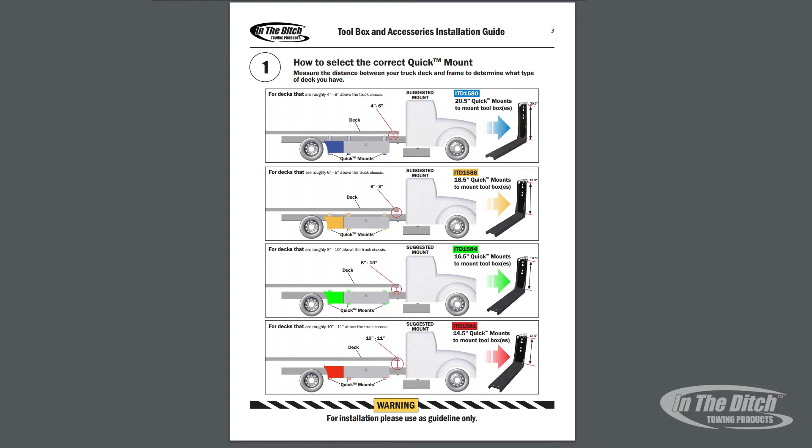So we're going to start out with step one, and that's to select the proper quick mount for your application. When selecting your quick mount, the first measurement that we recommend you get is from the top of your frame rail to the bottom side of your carrier deck or your utility bed. Once we have that dimension, you can enter it in our operations manual, and it's going to walk you step by step through how to choose the correct quick mount for your application.

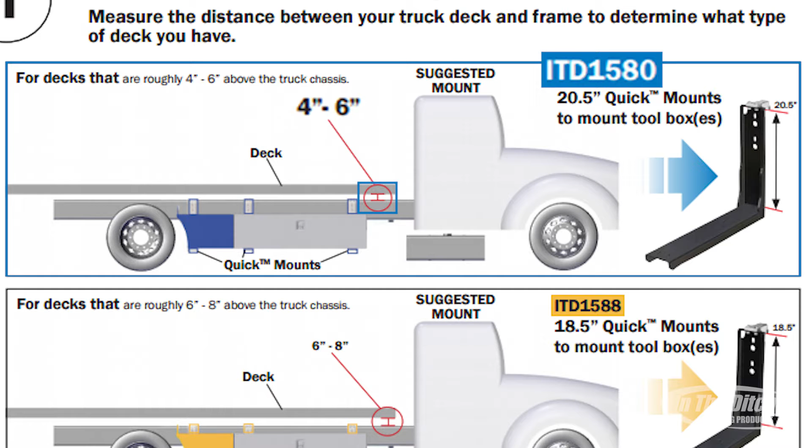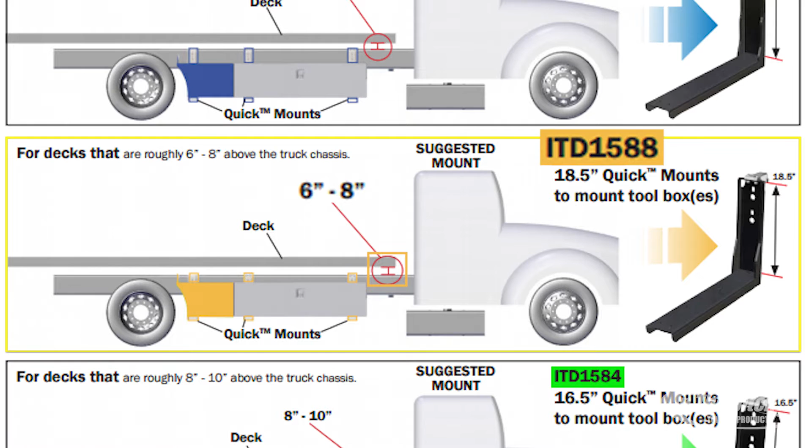If you have between 4 and 6 inches of gap, as shown here in the diagram, you'd want to choose the ITD 1580 quick mount, and that's designated by the blue icon. If you have between 6 and 8 inches of clearance, we'd suggest that you use the ITD 1588, which is designated by the yellow icon. If you have 8 to 10 inches, you'd go with the 1584 quick mount, designated by the green icon.

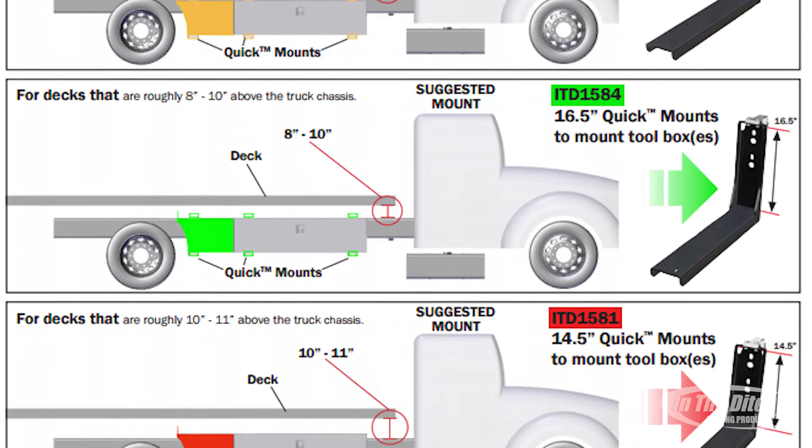And if you have 10 to 11 inches, we recommend you use the 1581 quick mount, which is designated by the red. If you want a real custom installation, we suggest you measure and choose your quick mount on your own, or call us and we'll help you.

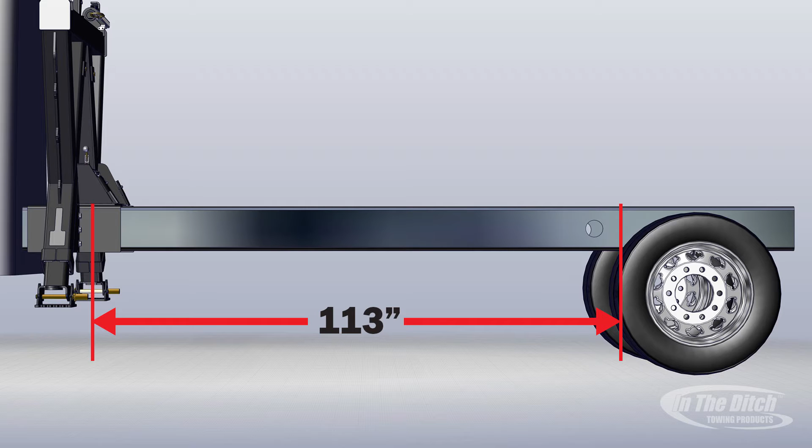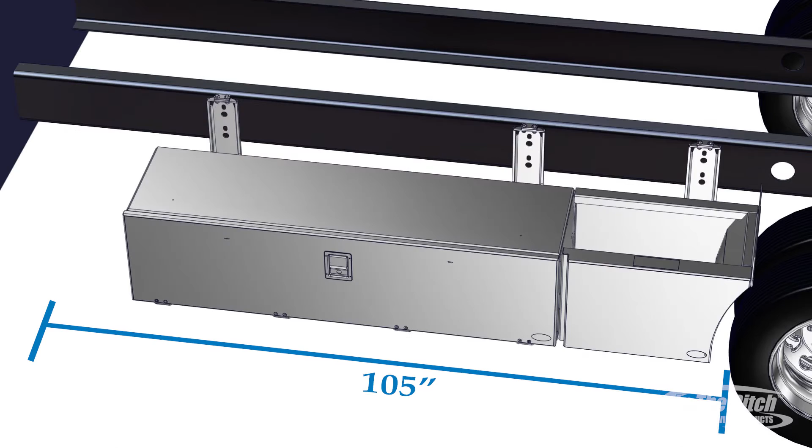Now that we've moved to step 2, what we want to do is measure the usable space, and that's the space between the rear wheel and the nearest obstruction at the front of the truck. And on this truck, we have 113 inches of usable space. Now we're going to subtract 5 inches for wheel clearance at the rear and 3 inches for clearance at the front of the toolbox. After we've done the math, we have 105 inches of usable clearance left. And what that tells us is that we can use any combination of toolbox, storage fender, or accessory as long as we stay within 105 inches.

Now we're going to move to step 3, which is choosing your toolbox. And for this tow truck, we've decided to use the 70-inch toolbox. So we're going to take the 105 inches of usable space, subtract 70 inches, means we now have 35 inches of space left over. We've decided on this particular build, we're going to add a storage fender. So we want to use the biggest storage fender we can, and we know we have 35 inches of usable space.

Now remember, at the beginning I'd mentioned that we're using the ITD 1580 quick mount on this that has the blue icon. So when we go to select a storage fender, we want to select from the blues, because those are the storage fenders that were designed to work with that quick mount to give you the best wheel opening look. So we have 35 inches of space, so we're going to move along and we find the ITD 2329 has 34 3/4 inch space.

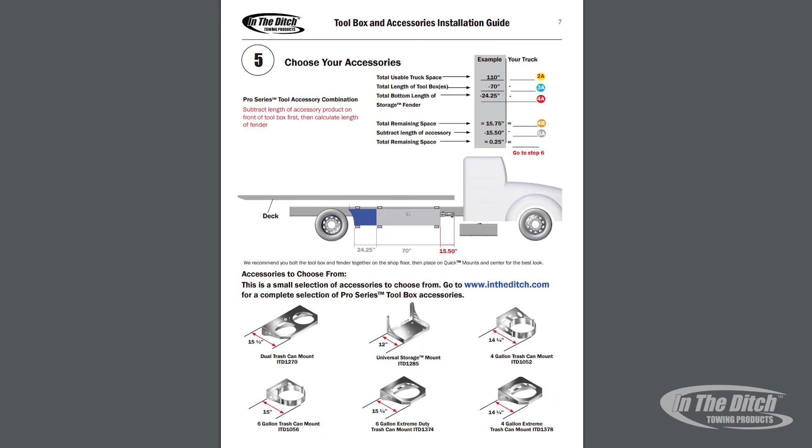So we're going to go back to our workbook and write that number in, and as you can see, we have a 1/4 inch gap left over, and we don't make any product that's a 1/4 inch long, so that's all we can use. Now if you don't want to use a storage fender, you would just move on to step 5 and work on your accessory, but the process is the same way.

Now all the measurements are done, all the product's been ordered and delivered. Now it's time to begin the installation process, and we're going to do that by going to our workbook and starting with step 1 of the toolbox and accessory installation. And as you can see, the very first thing we need to do is install our quick mounts.

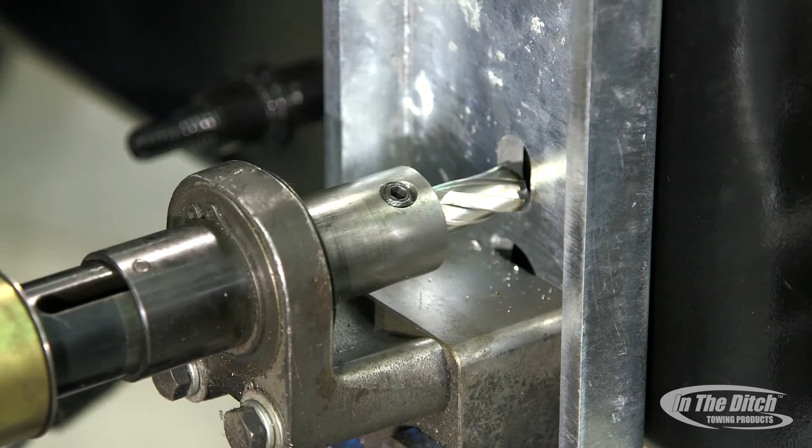When it comes to fastening the quick mount, we wanted to make it really easy for you to put holes in the frame. So we accomplished that by giving you 2 options. Option number 1 is if you're going to drill, you can drill using these 2 holes. But should you want to plasma cut your holes, we've created these 2 plasma template holes. And when you put your plasma cutter in there, we've sized the hole so that when your plasma cutter's done, you should be left with a perfect 5/8 hole.

It's important to point out when you're deciding where to put your quick mounts that you take a few things into consideration. The first consideration is that you need to put your quick mount where there's no frame rail obstruction. The next consideration is the toolbox. We really want to make sure that you mount your quick mounts within 18 inches of each side of the toolbox.

We recommend 2 quick mounts for all toolboxes, and in certain cases we might recommend a 3rd quick mount. If you're in an application where you're going to be packing a lot of chains in your toolboxes, or going over some really rough terrain, it might be wise to mount 3 quick mounts. The 3rd consideration is if you're going to add a storage fender. We insist that you add a 3rd quick mount or a 4th quick mount underneath your storage fender in all applications that do use a storage fender.

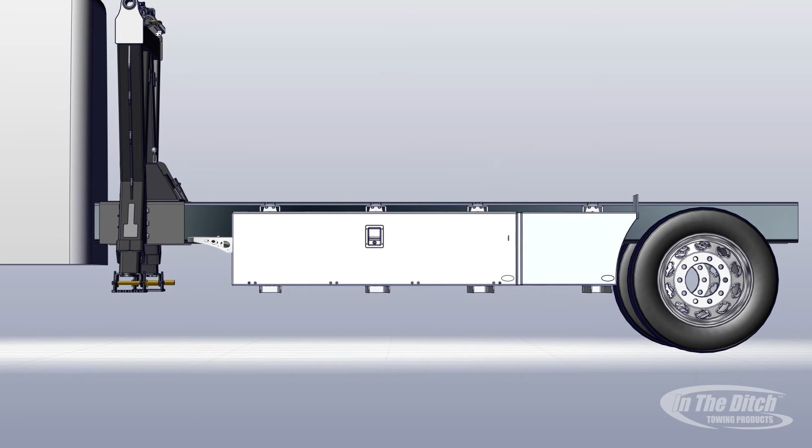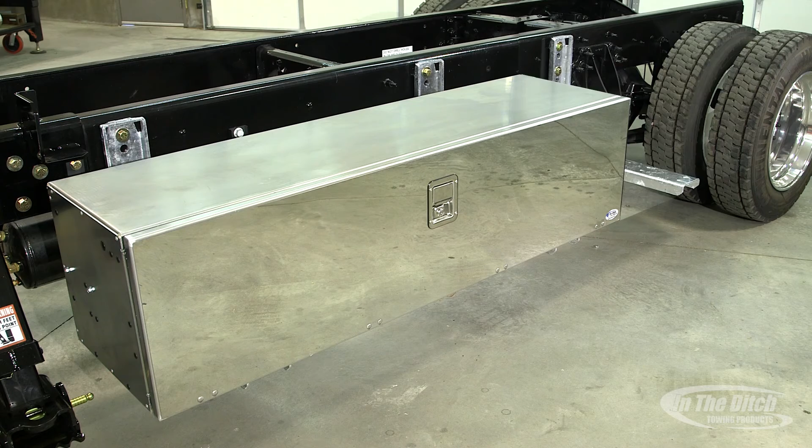Now as you can see, we've installed the quick mounts. We've also removed the quick mount fixture. The next step is to install the toolbox and storage fender. And there's two ways you can do that. One of the ways is you can mount the toolbox here and install it, and then mount the storage fender. We found it's a lot faster if we bolt the toolbox to the storage fender on a table before we install it on the mounts.

Now we're up to the customizing portion. This is your box. You're the one out there making the living on the side of the road, and you should be able to customize it in any way that you see fit so that it best suits your particular application. You can buy your toolbox from your In the Ditch distributor pre-configured from the factory. We'll install the half shelf or a full shelf or a jack bracket. There's really hundreds of variations that are available to you with an In the Ditch Pro Series toolbox.

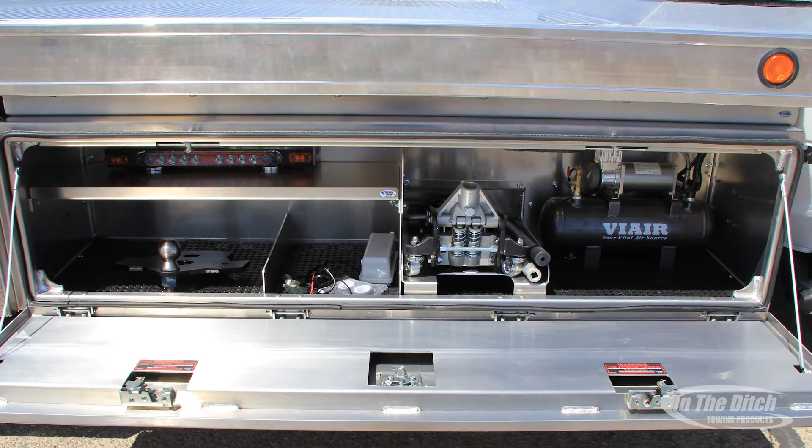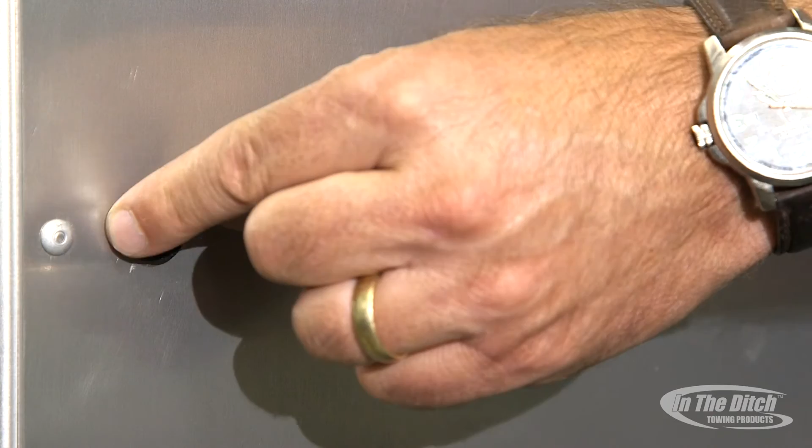When it does come down to customizing, if you choose to do it on your own, it's very simple. All you do is pop out these plastic plugs and bolt the shelves in. We've made all of the bolt holes commonized so that if you order your shelf after the fact, you just pop the plug out and easily bolt them in. It's really that simple. Now we've finished customizing the toolbox and installing the storage fender. The very next step is we're going to carry all of this over and install it on the quick mounts.

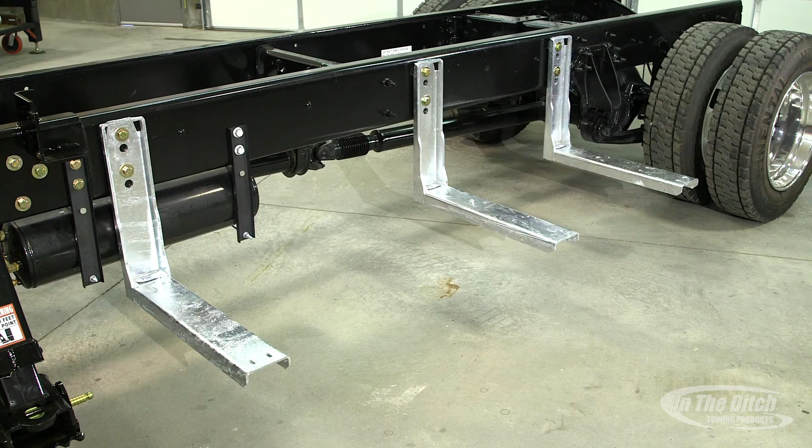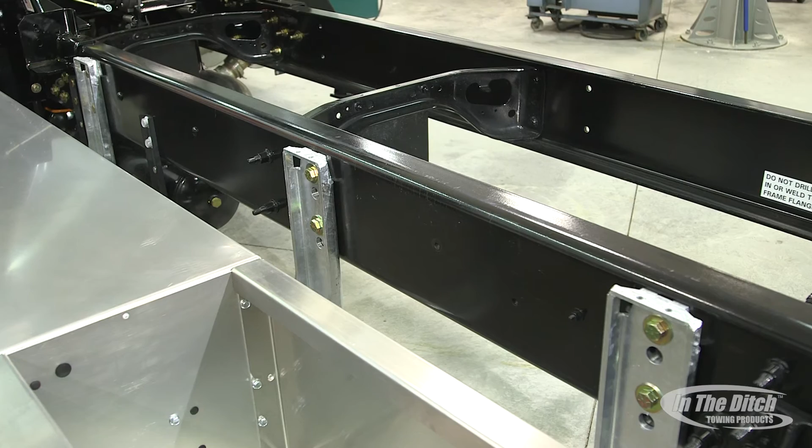Now we've just set the toolbox and storage fender onto the quick mounts. But before we go much further, I want to point out that we've done a good job of making sure that the quick mount was mounted within 18 inches from the edge of the toolbox. We've also installed one quick mount underneath the storage fender. So the very next thing we're going to do is slide our toolbox back and forth to make sure that we have at least 3 inches of clearance here at the front and 5 inches at the back, which as you can see, we've done.

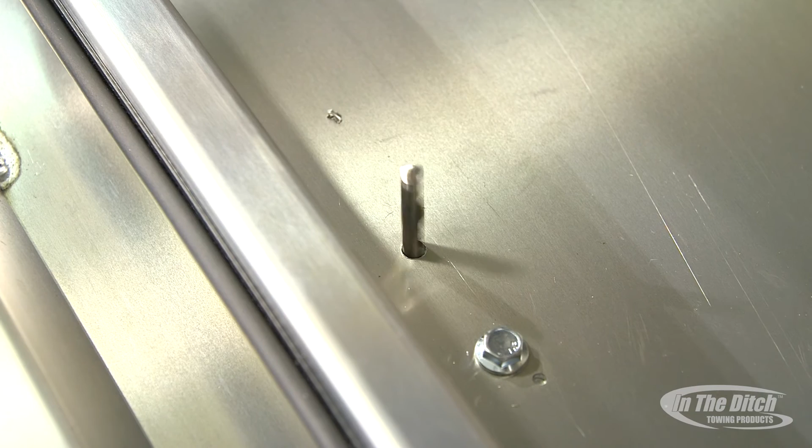Now we're going to slide the toolbox and storage fender back up against the quick mount stop tab. And when we slide it up against the tab, what that's done is it's already set the distance from the frame rail to the back of the box. So the box is perfectly in line, it's all lined up, and you don't have to waste time measuring. Now that we've accomplished all of that, we're going to begin the drilling process and bolt the toolbox down to the quick mount. Now we've drilled out all the mounting holes in the toolbox.

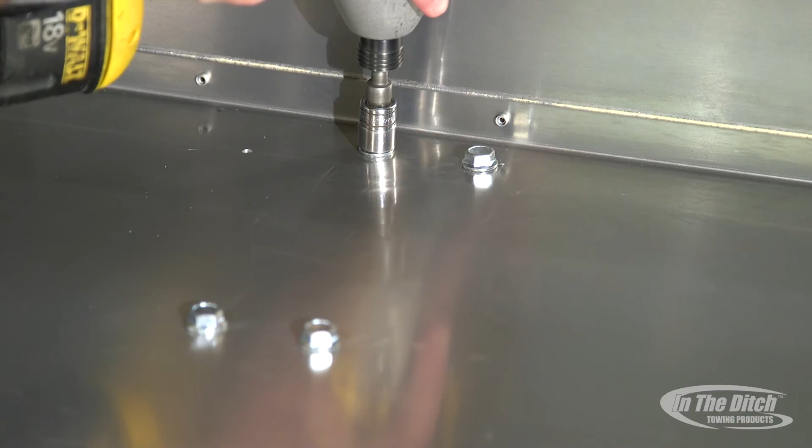Now we're going to install the lumber basket. And installing the lumber basket is as simple as removing the plastic plugs in the back of the toolbox and bolting the lumber basket directly to the box.

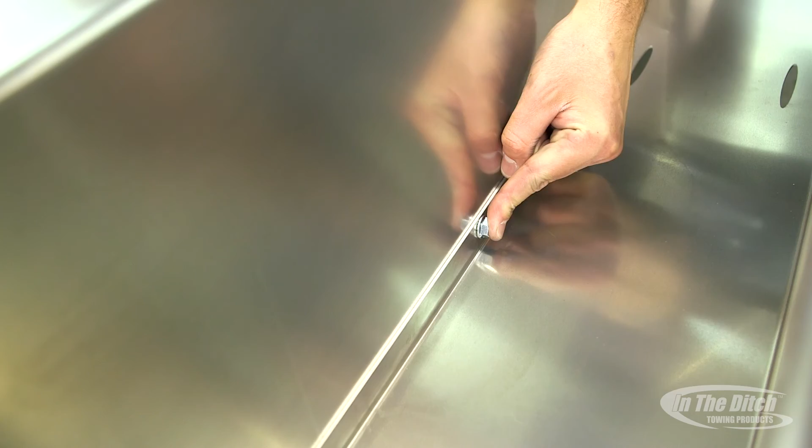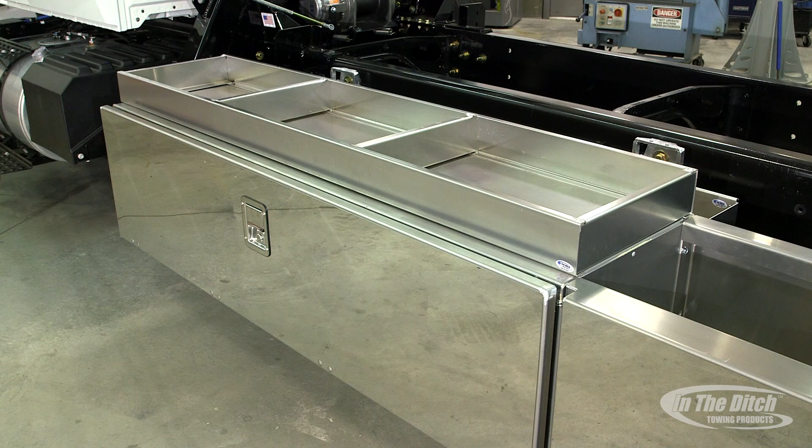Now we're going to install the box top. And our box tops come in many different sizes, lengths, and different configurations. And you have a choice if you follow along in your workbook on step number 6 on all the different combinations. But for this application, we're going to use a 70-inch box top with dividers. And on the other side, we're going to use the 70-inch box top without dividers, which is perfect for long items such as shovels and broom handles.

The final step is organize the storage fender, and you have a lot of choices here. Storage fender is a great place to store floor dry, tire chains, or extra strap. We're going to install an In the Ditch trash can mount, the new In the Ditch trash can. We're also going to install a fuel can mount as well as a fuel can. And that wraps up this section of installing your In the Ditch toolbox.